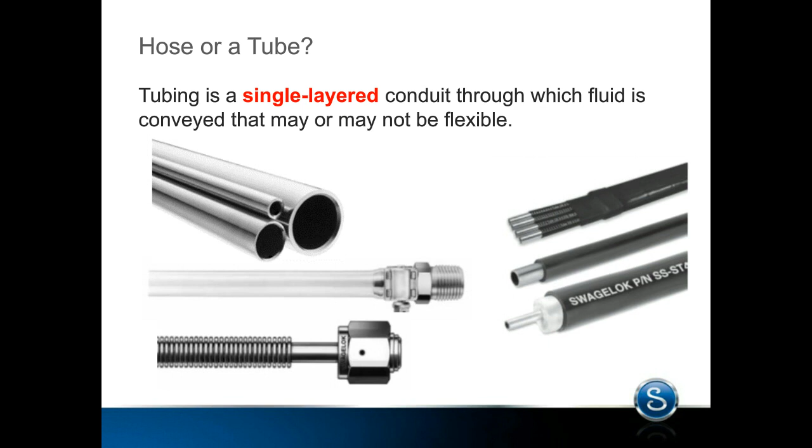Now, these are single-layered tubes that are still flexible. So people think of this as a hose, but technically these are actual tubes - we make them flexible, but they still act like tubing because they have only one layer.

So a hose, what is a hose? A hose is a multi-layer conduit where gas or liquid flow through. These multi-layers are what make hose much more complicated, but also allow the hose to perform better than tubing in some applications. The different layers are listed here.

They consist of a core tube, which is the wetted surface of the hose - it sees the media, so it's important to understand how the core tube is going to interact with the media. There's the braid, which is the pressure-containing layer or component within the hose. It's what maintains the pressure, so the stronger the braid, the higher the pressure the hose can contain. And the cover, which could or could not exist on a hose.

Sometimes hoses don't have covers and the braid is exposed, but some hoses have a cover that makes it cleanable or more abrasion resistant. Then there's the end connection, used to connect to the system. The end connection is inserted into the hose and either crimped, welded, or pushed in, and it needs to maintain the same pressure rating as the rest of the hose.

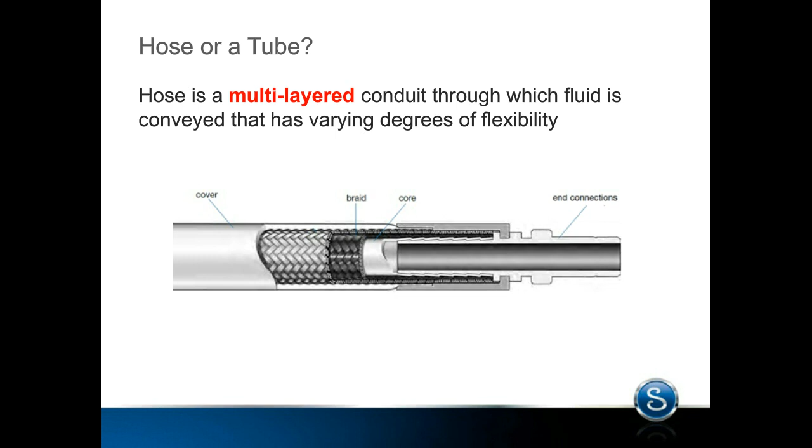As Swagelok has been in the hose business, we've gone around and inspected, visited customers, and collected data and comments from different customers. Some of them are listed here, and it gives us the impression of how different customers think of their hoses in their plant.

So some people say a hose is a hose is a hose. Just use whatever hose is available on the shelf. It doesn't really matter, why does it matter which hose I use? I just need to get it connected so the system is up and running again. And the hose lasts a couple months, but it's the way it's always been, so that's just what should be expected.

But other customers look at things a little differently, and they understand that selecting the right hose can greatly improve the way the system works. It can also greatly improve the overall safety of a plant, which can be even more important.

Some comments here: vibration used to cause leaking within weeks with our hose, but now we've selected the right hose and have no issues. Simply changing the way the hose was routed completely changed our maintenance program, so the customer was able to change the preventative maintenance schedule based on the routing.

All we did was change the hose series, and it now lasts over 20 times longer. Same system parameters, pressures, temperatures, and what have you, but now the hose lasts 20 times longer because the right hose is selected.

And basically, we won't think of a hose as a commodity again. You see different efficiencies based on whether a customer is really engineering the right hose into the system, or if they're just using whatever is available off the shelf or whatever was used last time. It can greatly impact how a fluid system works and how an overall plant is operated.

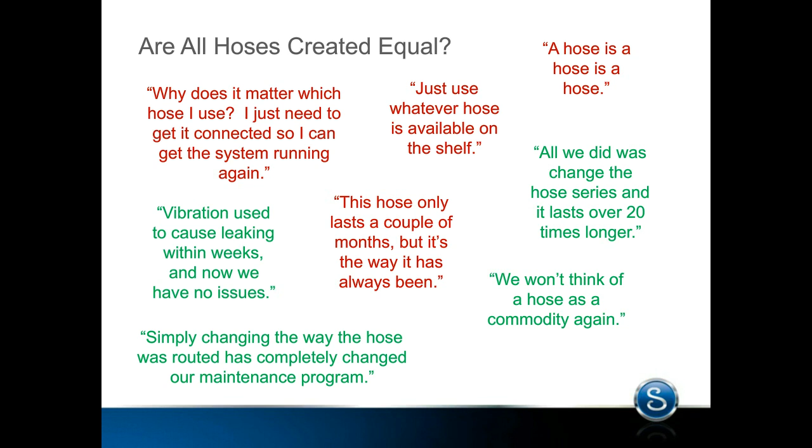So we want to ask a question to the group, and this can depend on what kind of media you have at your facility, but on the market there are many different types of hose: metal core, Teflon or plastic core, thermoplastic, and rubber core. We're interested in learning more about what kind of hoses you use. So at this point we'd like to take a quick poll on what type of hoses you commonly use in your facility. It could be all of these, but what do you use the most?

Okay, so it looks like we have no thermoplastic users out there, and this is actually in line with what I expected. We see when we go around to customer sites a lot of Teflon core and metal core. We don't see a lot of thermoplastic, but Teflon and metal core tend to be the highest used hoses that we see as well, so good to see this is in line.

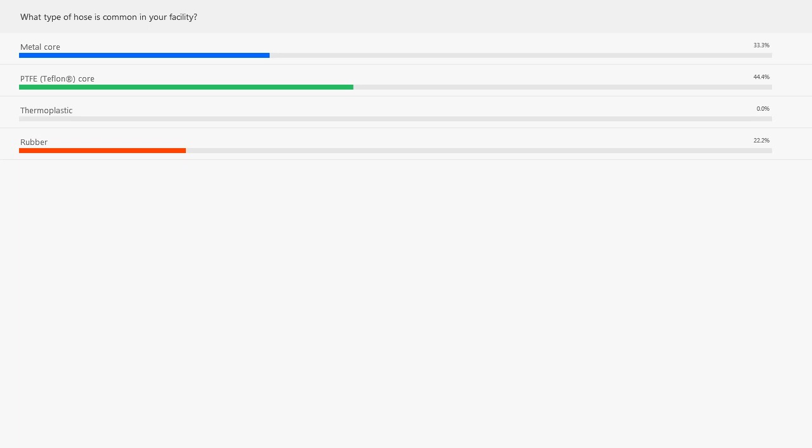Now, one more survey question before we move on to what STAMPED is.

You probably can tell from the question here, but what factors do you use when selecting a hose? It could be the size range, the temperature of the application, what kind of application it's going into, what the media is, whether it's corrosive or gas or liquid, what the pressures are, end connections, delivery considerations, or maybe none.

Different customers look at these different factors for different applications in many different ways.

Okay, so most people say the application. That's good to know. I think you can probably tell where this is going. We recommend that all these factors are looked at very strongly, and we'll get into why.

Yeah, so no one says media. Very interesting.

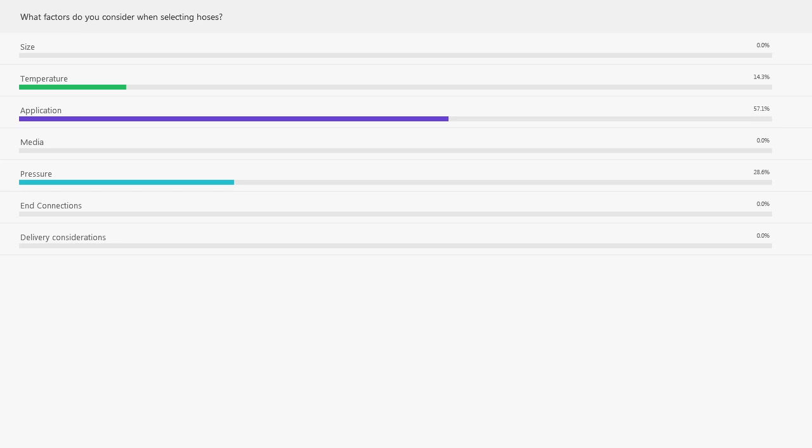We recommend the entire STAMPED acronym be looked at very closely when selecting the right hose, and we're going to explain why and go into detail on a couple of these a little later.

The first letter of STAMPED is size, and that basically means are you going to get enough flow through the application, and is the hose the right length for the application? That second bit is something that is forgotten quite a bit.

For size, the bigger the hose, the larger the flow you can get. A general rule of thumb is if you double the diameter, you quadruple the flow rate, because when you square the radius you get the flow area, so the radius is a squared term, and you quadruple the flow rate. So you go from a quarter-inch hose at 50 psi flowing 20 liters a minute, to a half-inch hose flowing 80 liters a minute, and so on.

You need to make sure you get enough flow for whatever your media is. There are various calculations to determine that, but many times that's already known going into the application.

More importantly, though, with hoses, many times they go into a dynamic application, so the hose is moving and bending, and it could be doing that repeatedly all day long, or just on occasion. Different movements require different amounts of excess hose to complete the movement without damaging it, and that can be forgotten when selecting the right length of hose.

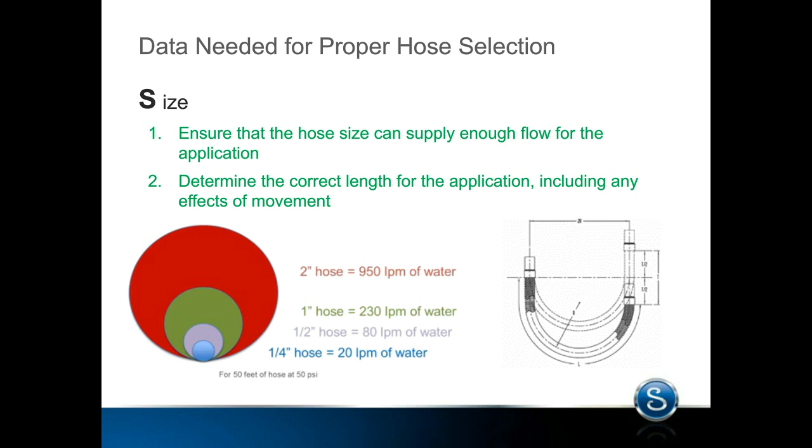Next in the acronym is temperature, T. This is pretty straightforward: you need to make sure the hose meets the temperature requirements of the application. This typically comes down to what the core tube is made out of. The core tube usually is the temperature restrainer—not always, but most of the time it's the temperature restraint in the hose.

Fluorocarbons, basically the Teflons and PTFEs, PFAs, widen that range quite a bit, especially on the upper side, up to 400 or 450, depending again on the material and how the Teflon is formed. And then of course the widest range is metal core tubes, offered up to 1,000 or so, depending on how it's made and the material, and as low as -300 or so. So if temperature is a concern, it will affect what type of core tube is required for the hose.

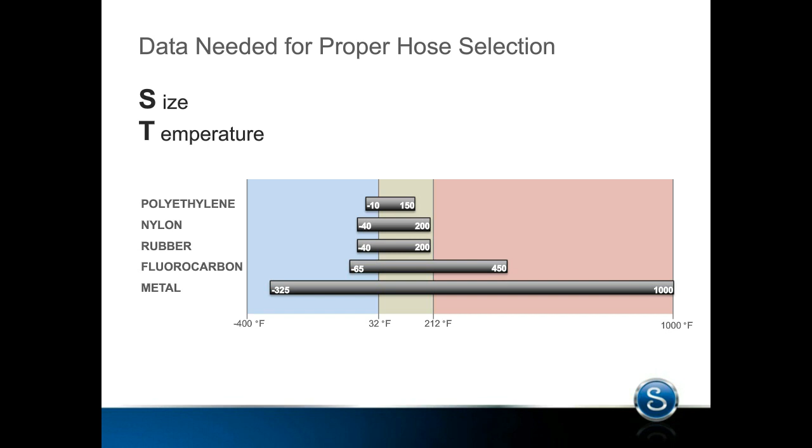Next in the STAMPED acronym is application. This was people's top choice, and I understand you could only choose one out of that list, but this was people's top choice. There's a lot we can talk about with application—many times this can come into whether or not there's vibration, whether or not there's a lot of movement, or whether it needs to be connected and disconnected many times.

But in this particular case, what we're going to focus on are the pressure variations. This isn't necessarily the overall system pressure, but basically how much pressure variation and how fast it happens in a system. We break this down into 3 groups when we consider hoses. The first is pressure impulse, meaning there's a pressure increase or decrease very, very quickly—we see this as a large pressure variation in under 2 seconds.

This can happen most commonly from opening and closing a ball valve. Imagine a quarter-turn valve that opens in well under 2 seconds, almost instantaneously. That full pressure flows into or out of the hose very quickly, and we call this a pressure impulse.

Now this is different for gases and liquids. Liquids, being incompressible, are the worst case because the momentum of the liquid does damage to all the components in a fluid system with a pressure impulse, including hoses. The core tube needs to absorb all that momentum when a pressure impulse occurs, and different core tubes are better at absorbing that impulse.

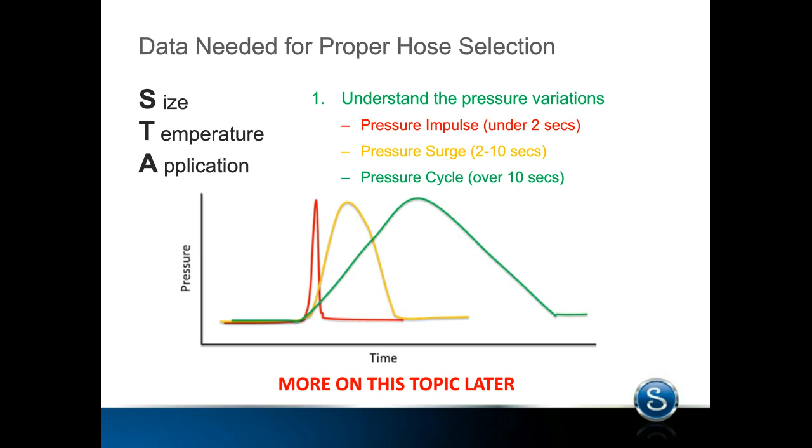Next in our STAMP acronym is pressure. Now, we talked a little bit about the pressure impulses and things, but what we're getting at here is just what is the system pressure? What is the design pressure, ignoring the impulses and spikes and surges and things? So the things to look for here are listed.

So it's important in a vacuum application to make sure the hose is rated for vacuum. There are times customers actually do not know if there is vacuum in their application, and vacuums can happen without an actual vacuum pump. You can have Venturi effects and things that cause vacuums in a system. So it's important to understand if that's going to occur if you're selecting a hose that's not rated for vacuum. Many are, but not all of them.

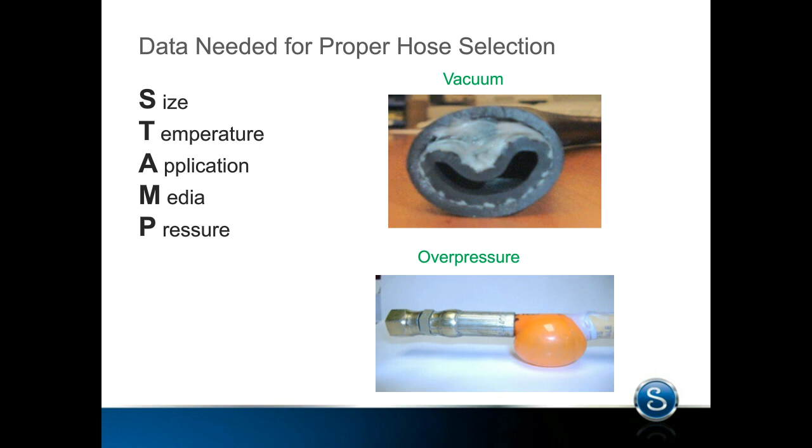Next is end connection, and of course this is fairly straightforward, but the end connections usually are chosen that fit into the system, so whatever we're connecting the hose to. But the thing we can run into with this, and all end connections really are offered on hoses, but what customers run into is a hose that needs to bend a certain way in order to be installed.

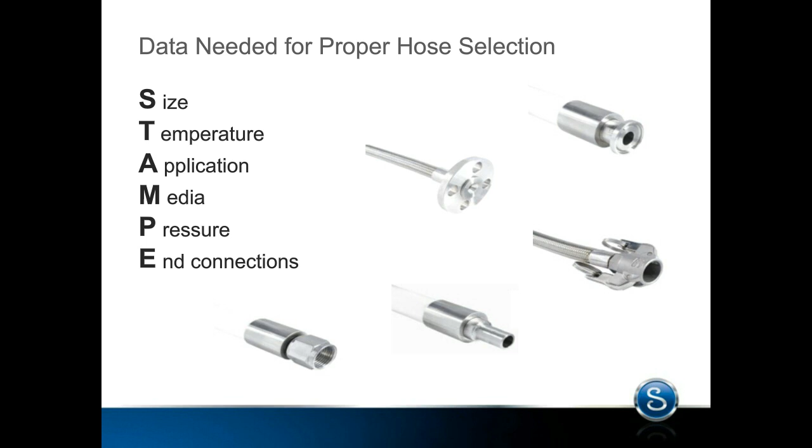And then lastly is our delivery considerations, and this one is probably the easiest of all. But this could pertain to a lot of other things related to the hose, such as is special testing needed in order to ensure that the hose is made properly. There's a lot of different testing that can be offered beyond the standard production testing. And are there things like special tags, special labeling, special lay lines that might be needed in order to have the hose marked properly for the application it's going into?

And then how should the hose be shipped? Is it okay to coil, or does it need to be bagged, and things like that, so that the hose arrives in the proper cleanliness and proper condition. So again, pretty straightforward. So at this point, are there any questions?

Yep, go ahead. Yeah, I was going to say, wow, there's so many things to be considered.

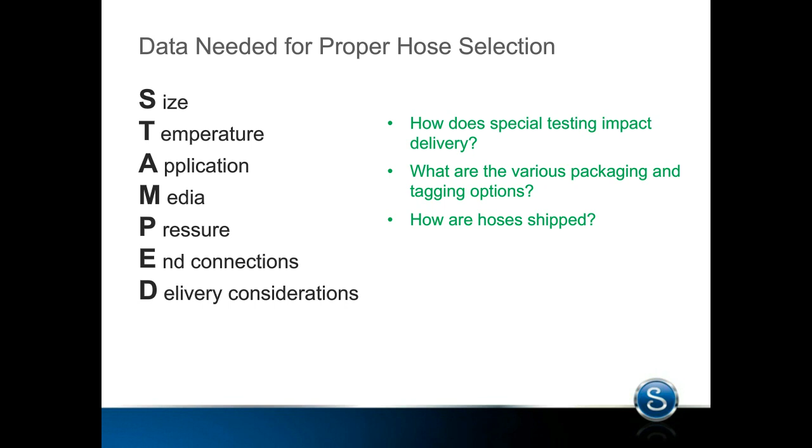So now we're going to get into some more advanced topics, and we touched on them a little bit with the stamped acronym, but we want to explain them in a little more detail because this is where people really go wrong when selecting hoses sometimes, and so we want to make sure that they're understood as best as we can. So the first one being permeation.

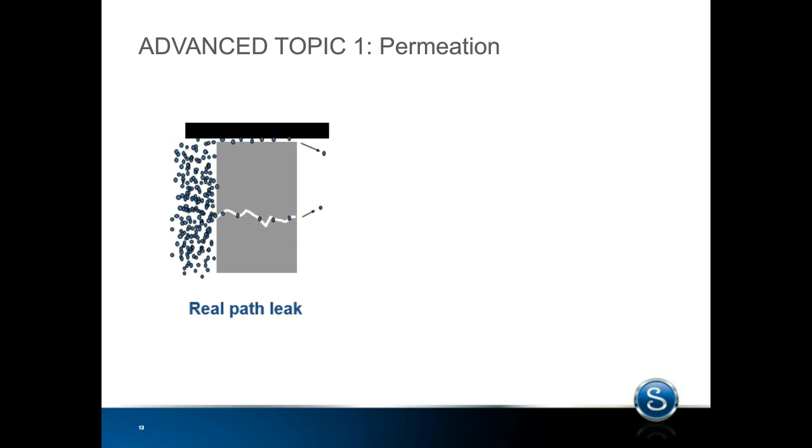And the gas molecules escape to the other side. And it's more of a function to do with what the gas is and what the media, or what the component seal material is.

Okay, we have a couple questions here. I'll go into those. First one is, does fiberglass braid resist permeation?

We've actually done some testing on this, so it's interesting. What we found is that the braiding itself on a hose resists no permeation whatsoever. We thought maybe it might, but this is happening on such a small molecular level that the holes between the braid actually do absolutely nothing to resist permeation. The only thing resisting permeation in a hose is the core tube. So whatever that core tube permeation rate is, the hose will see.

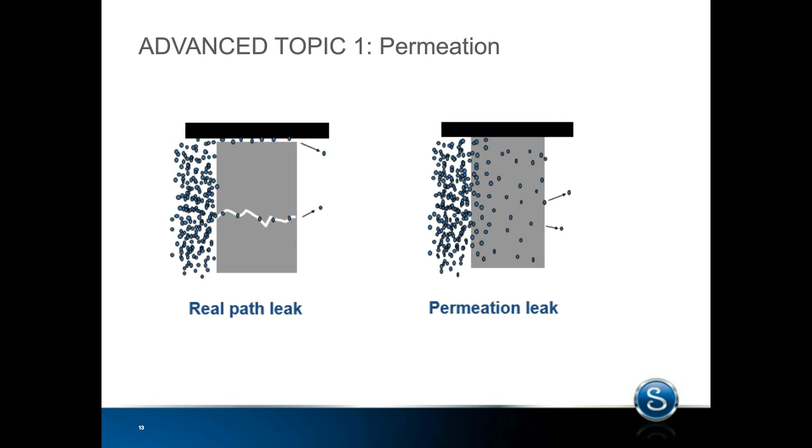And it will permeate through, the gas will flow through the braids basically instantly. Okay? A good question. We've actually thought about that and went into testing it.

So again, permeation flows through the core tube or through a valve seat or through a fitting connection, whatever it might be. And it happens at different rates based on the gas and based on the material it's flowing through. And it has a lot of other variables as well.

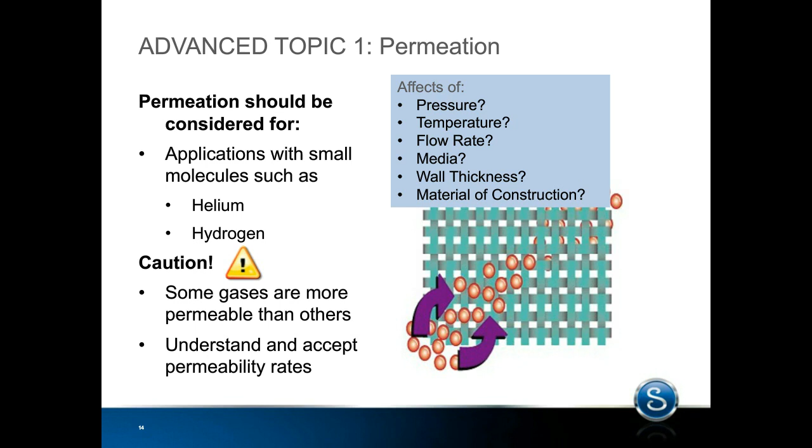And this is why permeation is a difficult topic to properly address in a lot of detail or a lot of precision. But the more pressure inside a hose, the more gas molecules will enter the hose and permeate through. The higher the temperature, the actual Teflon or hose core material will expand, making the holes larger, so increasing permeation, basically separating the spaghetti more, right?

Actually, flow rate does not affect permeation at all. We thought maybe it might, but flow rate through a hose does not affect permeation at all. The smaller the gas molecules, as shown here, like helium and hydrogen, will permeate much faster than larger gas molecules. And actual gas permeates obviously much faster than liquid.

Liquid almost permeates to a level that is zero. The thicker the wall, or for example, the thicker a valve seat or whatever it might be, the slower the permeation will be. It's inversely proportional. So if you double the wall thickness of a hose, you will half the permeation rate. And the materials of construction, there's different things you can do to rubbers and plastics and Teflons that will slow permeation, but it has other effects. And so we want to get into some of those effects.

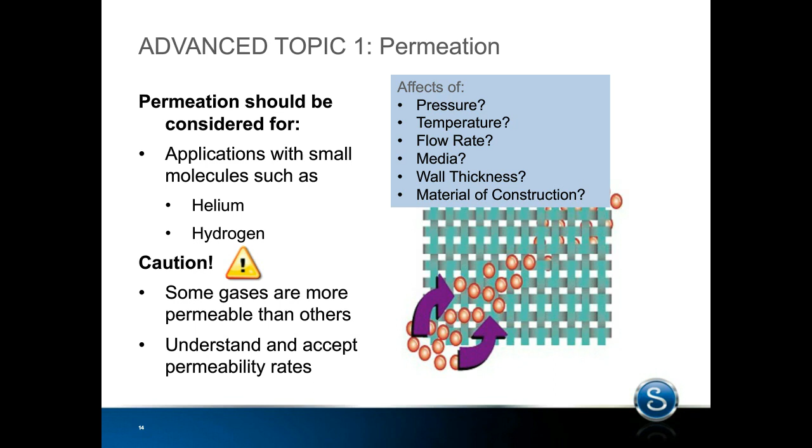And to understand the effects, we want to make sure that we understand these two core tube types. So the first we're going to compare is a fluoropolymer core tube. This is a Teflon, PTFE, PFA, or other different material core tubes.

There are things we can do to these core tubes that change the permeation rate, but in general, they're permeable. You can get these core tubes with carbon black that helps with something called static dissipation, which we don't have time to get into today. But they're smooth bore, so they're cleanable, and they tend to be more flexible. That's their advantage. The disadvantage tends to be that they're permeable, and virgin Teflon tends to have relatively high permeation rates.

We can take this Teflon and bake it, and we call that a sintering process. We can bake it at different lengths for different amounts of time. What that sintering process does is tighten up the molecular structure of the Teflon, making the spaghetti closer together, which slows down the permeation rate.

There are two that we use at Swagelok that we call slow sintering and post sintering. Slow sintering is a slow baking process after the core tube is made, and post sintering is a very long bake after the core tube is made. Slow sintering, think of it as a pizza oven, where the core tube slowly moves through an oven, like a pizza. The post-sintering is taking the entire core tube and putting it in an oven and leaving it there.

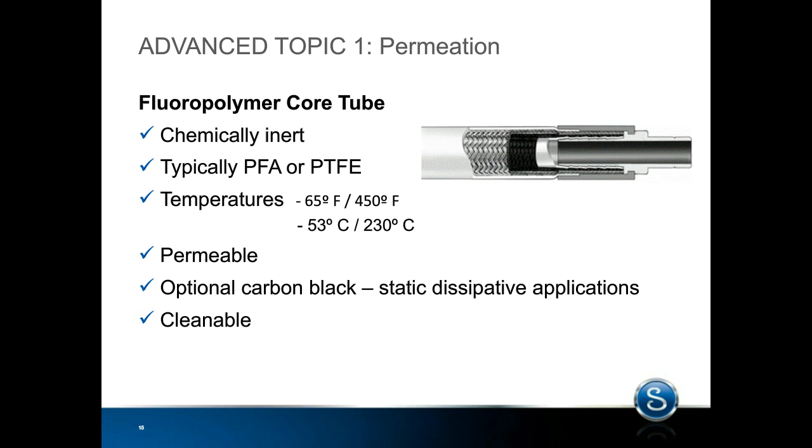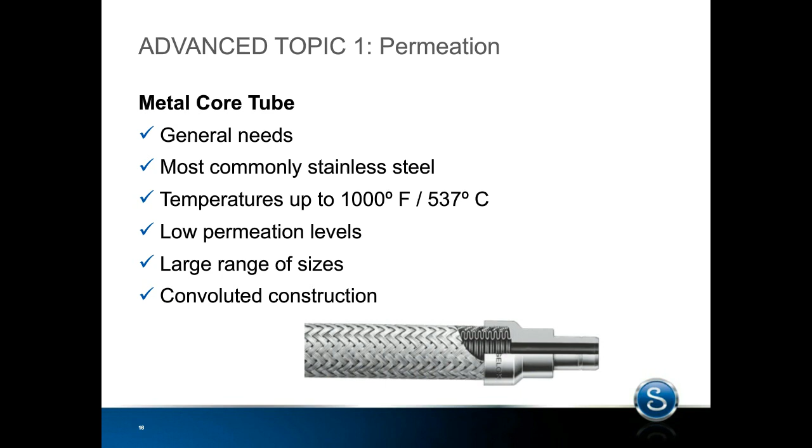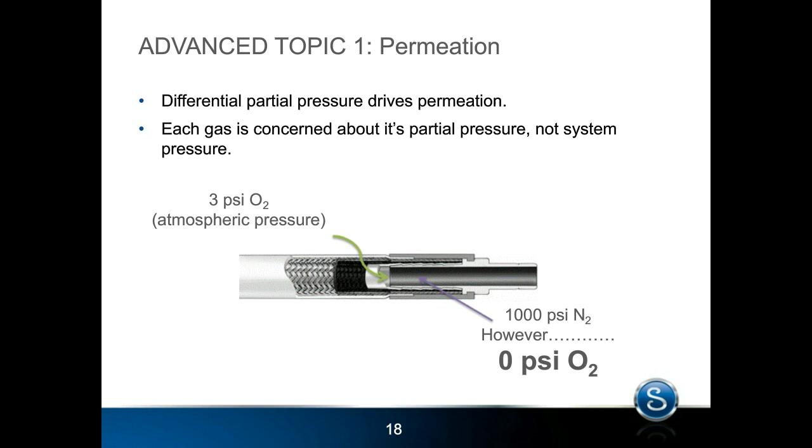What people don't always understand is that there's 0 psi oxygen on the inside of this hose, and 3 psi oxygen on the outside. People tend to assume that 1,000 psi of nitrogen will stop the oxygen from permeating in, and that's absolutely incorrect. Oxygen will permeate into this hose at a slow rate because it's only 3 psi, but it will permeate in. That's something not everyone is aware of, and it can affect the way hoses work if it's important to keep oxygen out of a system. In this case, it will not - it will permeate into the hose.

So it's important to understand the partial pressures of every gas surrounding a hose if permeation is a concern.

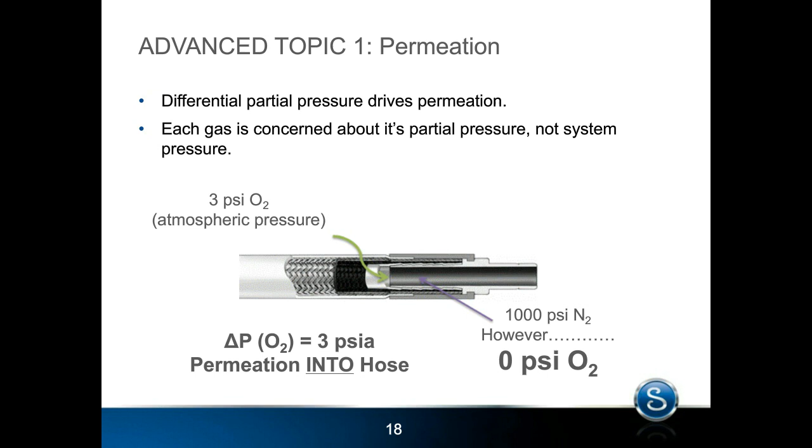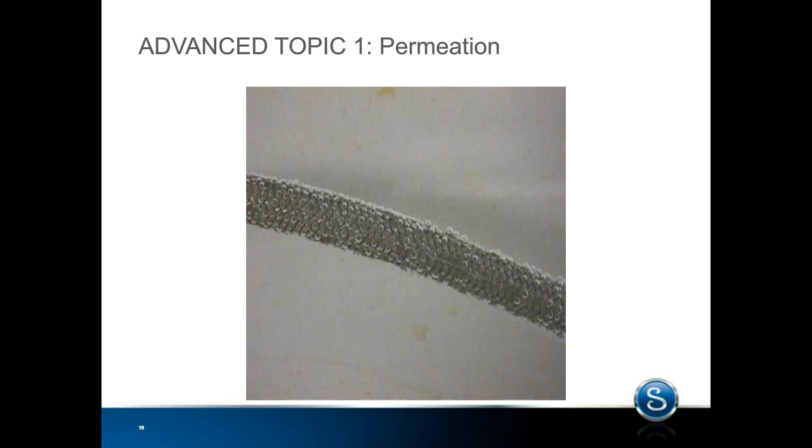So when we look at relative permeation rates, Swagelok has done quite a bit of testing with this, and we're actually going to start doing much more. We look at relative permeation rates of different core tube types, and we have some listed here. So mechanically and hydroformed metal core tubes, we'll talk about what that means in a minute.

And then we talked about these three Teflons. So there's normal Teflon, there's the slow sintered, which is like the pizza oven Teflon, and then there's the post sintered, which is baking a cake Teflon. And then there's different rubbers, right? Buna, Viton, Kalrez, whatever it might be.

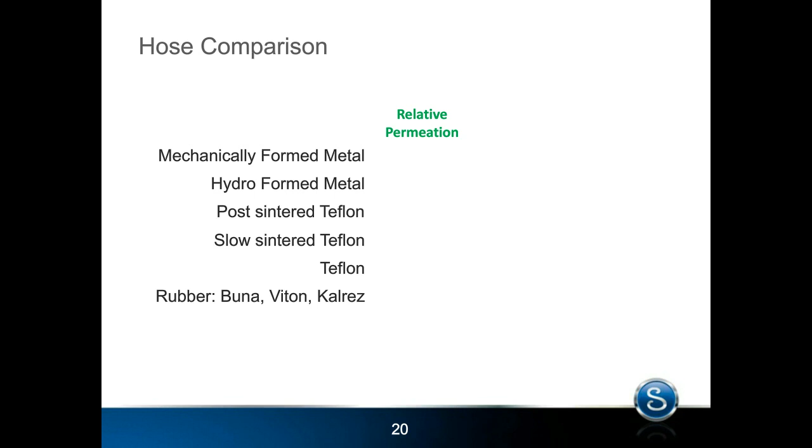And if you look at relative permeation rate, if you say metal is a 1, so very, very low permeation rate, a post-sintered Teflon permeates about 10,000 times more than that. A slow-sintered Teflon about 20,000 times more, so a slow-sintered permeates about twice as much as a post-sintered. Normal Teflon, though, permeates about 10 times a post-sintered Teflon. So that post-sintering process that is done cuts the permeation rate of a Teflon into 1/10, and that's the advantage there. That slow sinter process, you can see, cuts it in 1/5.

And then rubber hoses will permeate the fastest because the material structure has the largest holes between the molecules of the hose.

Okay, we have a question here. What hose is recommended for a high-pressure CNG up to 3,600 PSI? Typically for those type of applications, we recommend our thermoplastic product lines, which we don't get into in this presentation, but I'd be happy to send some detail on that later. That's our thermoplastic nylon core, essentially, products.

And we have another question now, too. How long should the hose be when used to absorb vibration? Yeah, that's a very good question. Is Teflon or metal a better choice? And what about routing the hose? Those are very tricky questions. The easiest one is that middle one.

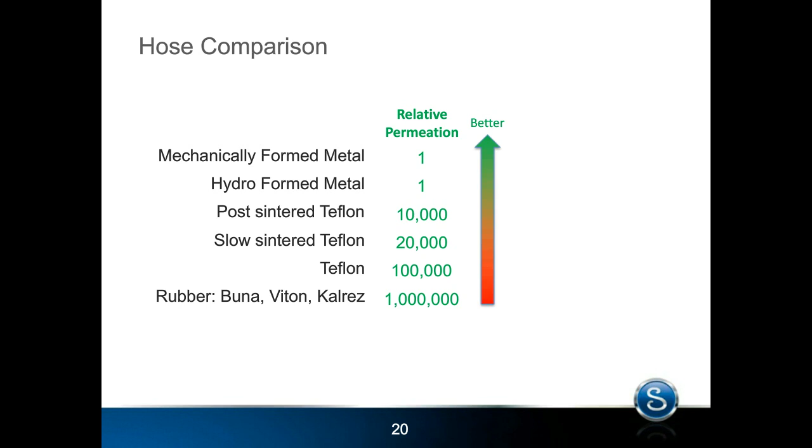We're going to move on now to impulse, and we discussed what these different impulses are: impulse, surge, and pressure cycles, so I won't repeat that. But this comes into play with metal core tubes because, again, metal absorbs impulses worse than Teflon core.

And so a metal core tube can be made two different ways. But before we get into that, what basically is done is a steel strip is turned round and then seam welded down the length of the round tube. And then we form these convolutions in that tube.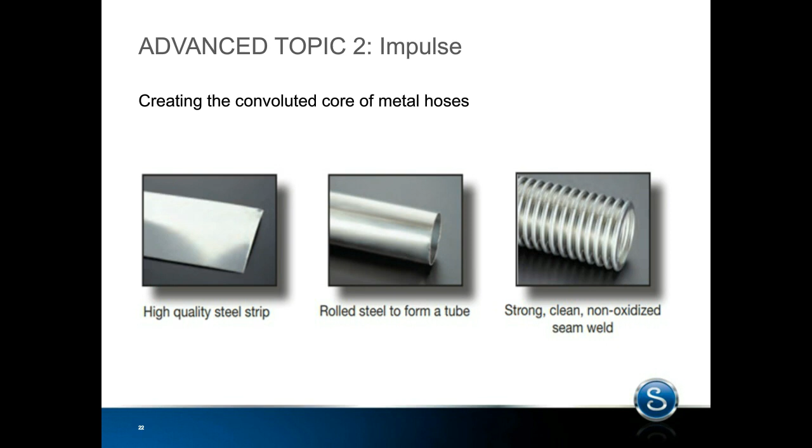And those convolutions can be formed two different ways. They can be formed mechanically, which essentially is a press form that pushes the material into the convolutions, or they can be hydroformed. A hydroform is pressurizing the inside of that tube with water and making it create that form against a die. And that's a far superior way to form a metal tube because it spreads out the forces evenly along the entire core tube. This keeps the core tube thickness the same, so we can maintain a 4-to-1 burst.

There's no thin spots, and it also spreads out the residual stress so that there's no high or low stress areas. Mechanically formed tubes get high stress areas right where the forms are made, and it also makes very thin sections of the core tube, which can affect the burst rating.

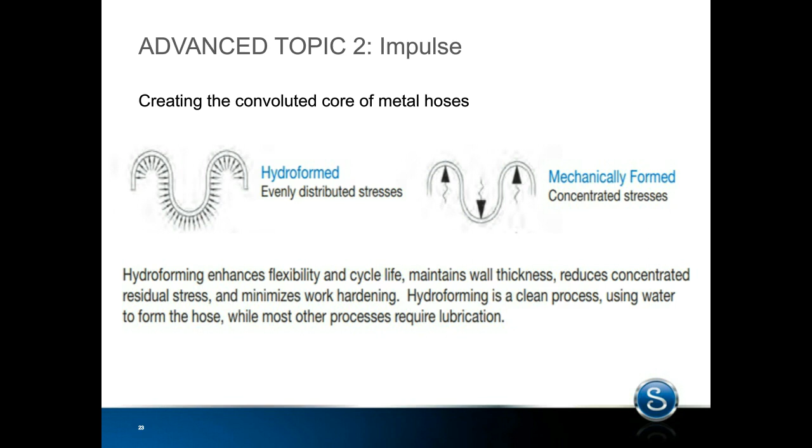Now we see this come into play when we look at how a metal core tube withstands impulses. We look at this same graph we looked at for permeation, but now for how well these core tubes can withstand impulses. We impulse cycle these core tubes and test to see how long they last, essentially how many impulses they withstood before rupture. A mechanically formed metal core tube will last in the neighborhood of 10,000 impulses. So when we do that ball valve cycle test, it's only 10,000, as compared to rubber, which lasts well over 1 million.

The hydroforming process spreads those stresses out and maintains the correct wall thickness in the core tube, and we get about 7 to 8 times the number of impulses out of a hydroformed core tube. Again, it's not quite to the level of Teflon. Teflon, being a softer material, can absorb the pressure impulse much better, and we get hundreds of thousands of impulses based on the Teflon. But hydroforming metal does increase the impulse life a great deal.

Now you can also see the sintering process decreases the actual impulse life, because what's happening during sintering is you're hardening and compacting the Teflon. So it improves the permeation, but it decreases the impulse life. It's still very high, but it decreases the life a bit. These things are important to understand with your application to see what type of core tube is right.

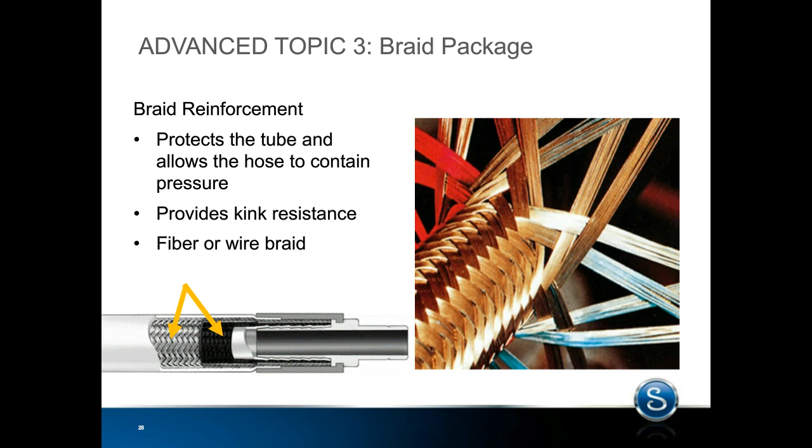A braid package is the angle of the braid, along with the number of braids in the hose, and the wire material and thickness. All that needs to be specified by a proper braid package. One thing we've found to be very important is the braid angle, which is part of the braid package. Of course we specify the number of braids, wire thickness, wire strength, and wire material, but we also specify the braid angle, and we've found this to be a key component in how a hose works. Even though all hoses may look the same, based on the braid angle, they can perform very differently.

The braid angle is the angle at which the braids wrap around the outside of the core tube, as you see with the red lines. If the braid angle is too shallow, meaning the wraps go around the hose too quickly, what happens is, under pressure, they steepen, and the hose core tube is allowed to grow in diameter.

The hose material can't be made magically, so when the hose grows in diameter, it shrinks in length. This can lead to pretty catastrophic failures. First, the core could burst because it can't withstand that kind of growth in diameter. Or, because the hose is shrinking, it could pull the end connection out. Both are very bad and dangerous failures, so a shallow braid can be very dangerous.

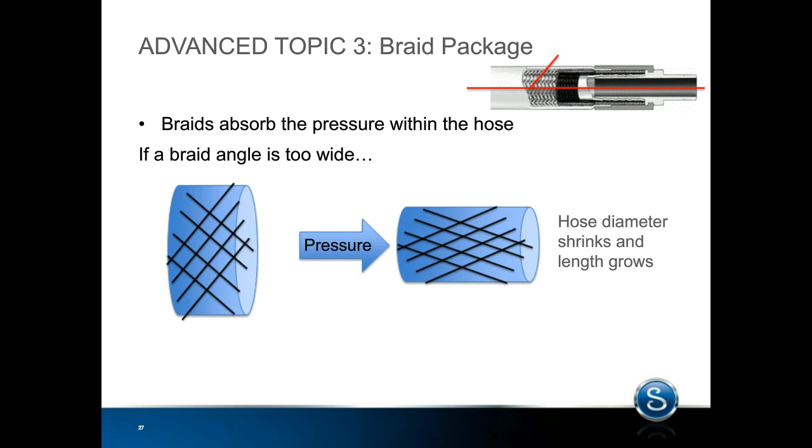Likewise, a steep or too wide of a braid angle under pressure causes the opposite effect: the hose will crush the core tube. The braids will flatten out and crush the core tube, and the length will grow. The length growing usually isn't a concern, but crushing the core tube could collapse it and remove the crimp pressure. So if this is a crimped hose and you crush the core tube, you can lose the crimp pressure on the end connection, and it could separate from the core tube, which is again a very dangerous failure.

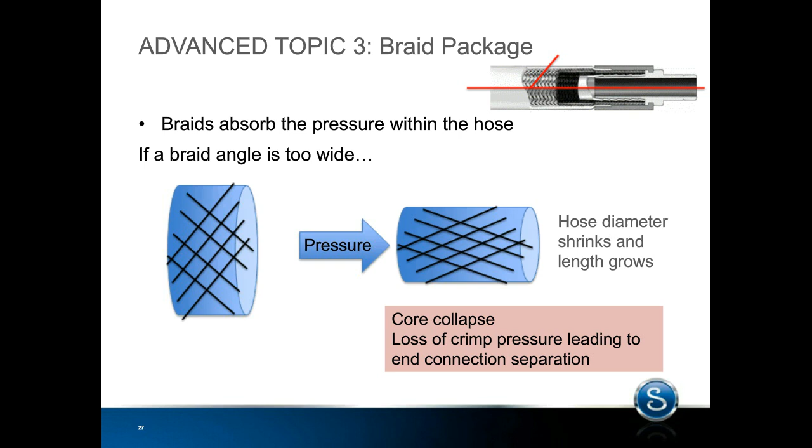So braid angle is an extremely important factor in a braid package, and we do a lot of testing at Swagelok to maintain what we call a neutral braid angle. Every hose, depending on the braid material, braid wire count, and hose diameter, has a different neutral angle. We test that closely to make sure we maintain it so our hoses do not grow or shrink. The braid maintains pressure on the hose without allowing it to grow or shrink, keeping our 4-to-1 burst ratio, and everyone's safe.

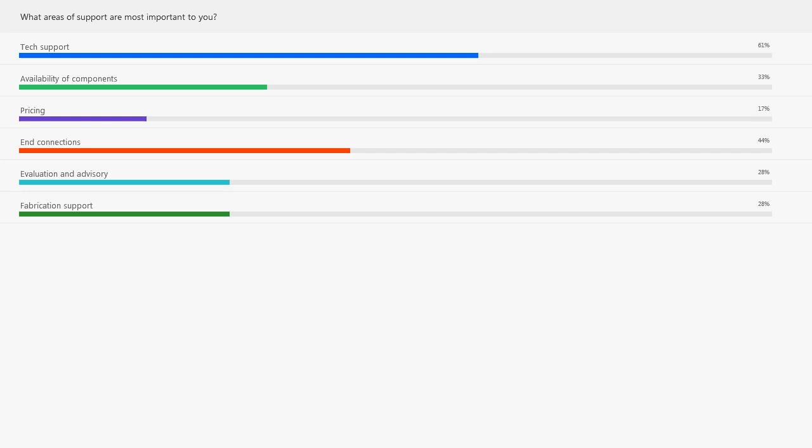So as Doug said, my name is Nick Iverson. I'm a field engineer with Swagelok, and to give you a little background, what the field engineer does is work really closely with our customers, and I spend a lot of time out in the field, on site looking at applications and just trying to gain a better understanding of what customers are doing and how that affects the products and how to optimize the product usage and the systems.

So with hose being one of my areas of specialty, I've also spent a lot of time on site specifically looking at hoses. And the idea with hoses is always knowing that a hose is not going to be a permanent component in your system. You know that the lifespan of a hose really depends on how you use it, and hoses need to be on preventative maintenance schedules. So when I go on site, what I look for in the following slides is kind of like a checklist of things to look for when you're walking around looking at your hoses, trying to understand the current situation and looking for improvements in your system and ways to increase the lifespan of your hoses.

So here's the things to look for. Is this a building slide? Am I correct here? Click on it. Okay.

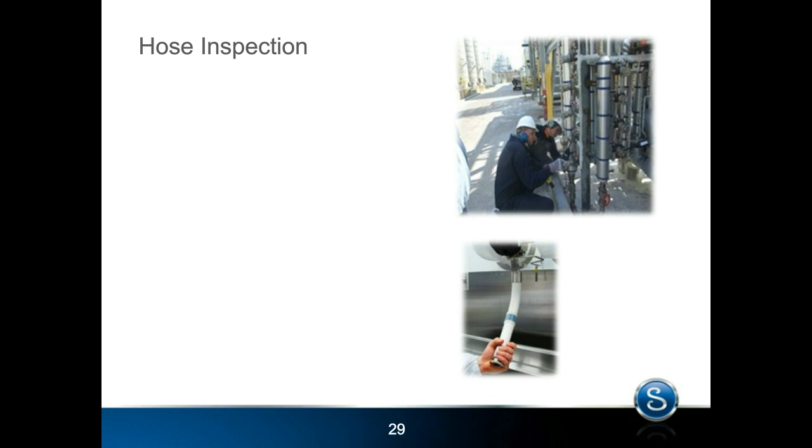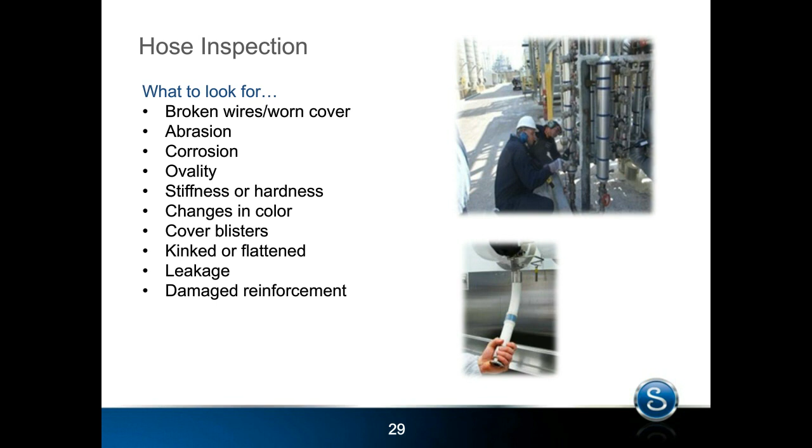So as we start to cover each one of these points, I'll let you know what causes this kind of damage, and then potential ways that you can address this damage.

So the first one here is the worn cover, broken wires. This is typically caused by excessive abrasion. It's easy to spot, but to address it, you need to do some root cause analysis and try to figure out what could be causing the excessive abrasion. Is it rubbing against another hose, or is the location of the hose a problem where things can be moving past it and rubbing up against it?

So when you have this excessive abrasion and you start to damage the cover, the job of the cover is to provide some protection for the braid. Once that cover is gone and removed, you're no longer protecting the braiding the way that you'd intended to. One of the issues is that it can wick up moisture, and moisture can get underneath the cover and start to cause damage to your braid. In the pharmaceutical industry, damaging the cover means that hose is going to be less cleanable - that's also a problem there.

And of course, if you damage the cover itself, you're lowering the pressure handling capabilities and you're reducing the kink resistance. So you're increasing your minimum bend radius.

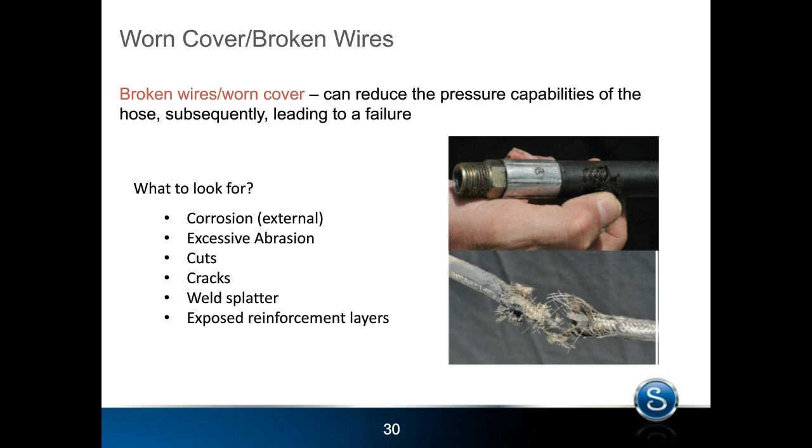Ovality is basically - ideally your hose is going to be perfectly round, but as you start to bend a hose, you get tension. You get tension on the outside, and compression on the inside, and those forces are battling hoop strength, and eventually your hose is going to start to become more oval shaped. As you walk around and look at your hoses, any hoses that look like they're a little bit squashed means they're getting very close to their minimum bend radius, and kinking is imminent. So look for these.

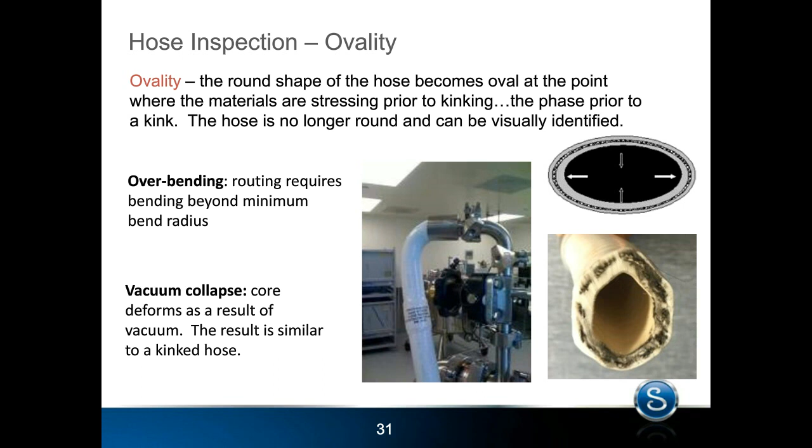So what is a kink? I discussed it as when the outside of the hose is in tension and the inside's in compression, and when those forces overcome the hoop strength, the hose kinks. Kinking is very bad for a hose because, like Doug mentioned earlier, a hose is made up of many layers, and we can't see what all those layers look like. From the outside, you can usually see that a kink has happened, whether the kink is happening right now or has happened in the past - there's permanent deformation on the hose. What we can't see is what the inside layers of the hose look like, and if they're permanently deformed, you've definitely lowered the pressure handling capability of your hose. So anytime you see a kinked hose, it's definitely time to replace it.

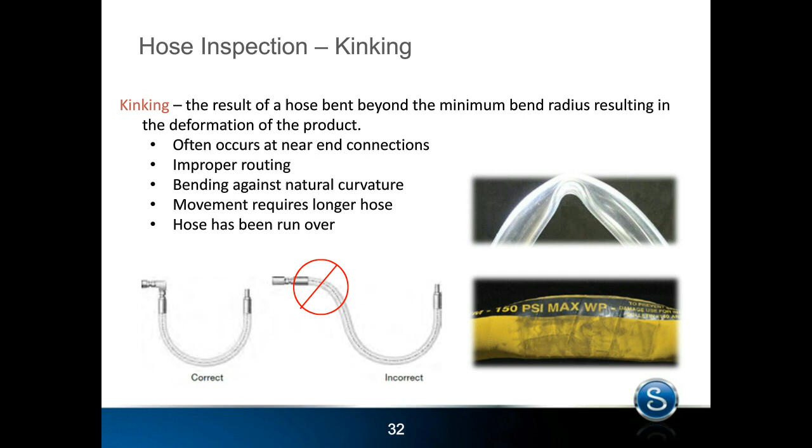Some other issues with kinking hoses could be that if you actually damage the braid and the braid wires are sticking out, that's definitely a safety hazard. If you're handling the hose, like in that lower left picture, you wouldn't want to run your hand along it or move it around, because you could fish hook that braid into your hand. That's a safety issue. These other pictures show what happens when a hose bursts at a kink.

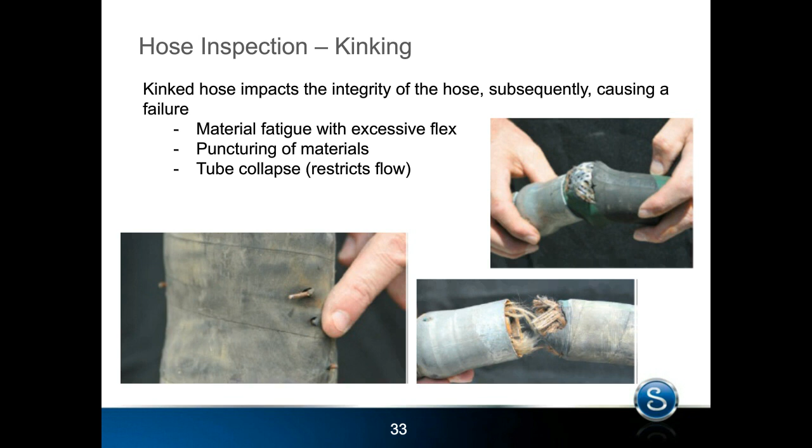Stiffness or hardness - these are obvious ones. If you look at a hose, you can see this, and a lot of you have maybe seen something like this. It's pretty typical for a rubber hose that's been exposed to the environment. UV will continue to cure the materials in the hose and cause it to crack and dry. You could call it dry rot.

Exposure to extreme temperatures and chemicals can also damage the hose. One thing people don't realize is that ozone can actually damage rubber hoses. So if your hoses are being used near high voltage power supplies, you should be sensitive to ozone damaging your hoses, and also near high intensity lighting sources. If hoses are stored in a warehouse setting with high powered lighting above them, those hoses should probably be covered so you're not reducing the lifespan of your hose before you even install it.

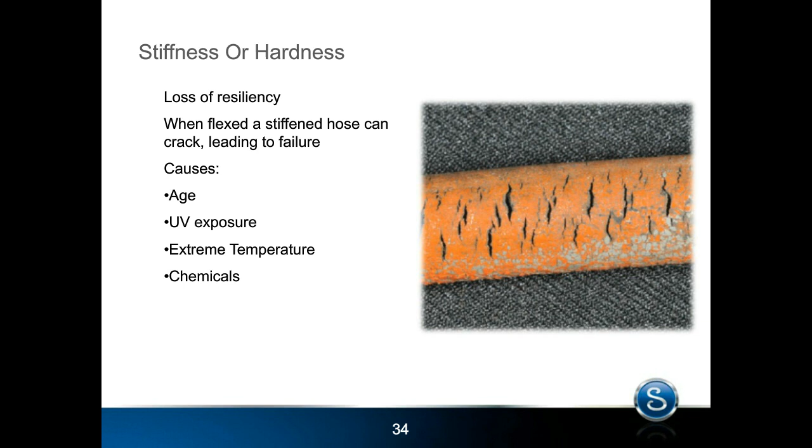Color blisters - this is kind of a no-brainer too. If your hose is changing color, something's chemically happening to your hose, whether it's chemical or corrosion. Anytime your hose looks different than when you installed it, and it's not just because it's dirty, but something's happening chemically or physically to the hose, it's time to take a look at it and possibly replace it.

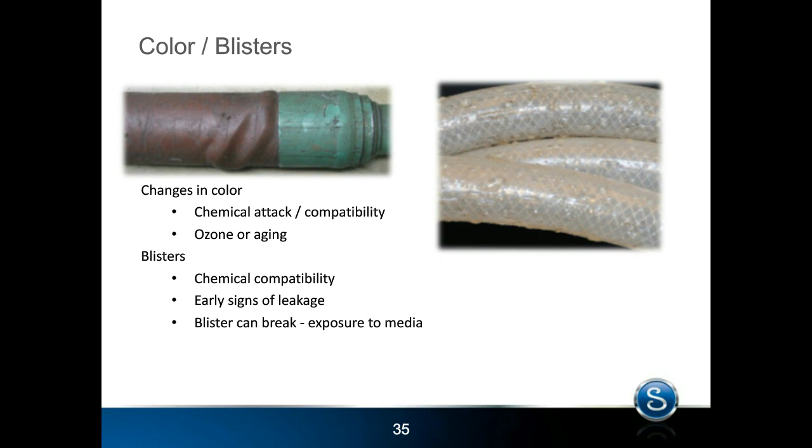And then just some other general damage to hoses that I see is a crushed hose, run over by something. It's not uncommon to see a hose that's been run over by a forklift, especially these rubber covered Teflon hoses. I see this a lot.

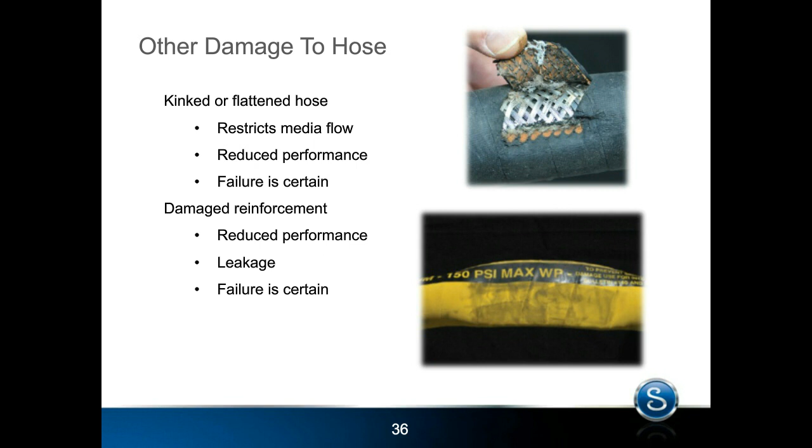I saw a question came in, but did it get answered? I think it might have. I don't think it did.

The question was: does the addition of fiberglass on your hose help with kinking? So any of the reinforcement layers are going to help the core tube. It's going to reduce the chance of kinking. So yes, a layer of fiberglass will definitely reduce the chance of kinking.

There's also accessories that you can add to hoses, in addition to the actual hose material itself. There are different types of spring, and in some cases armor, that you can apply to the outside of the hose. The armor - we have a product called Armor Guard - it actually reduces how far you can even bend a hose.

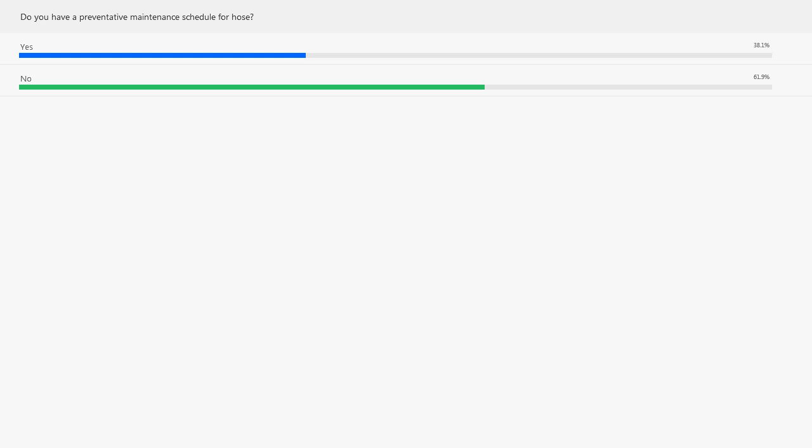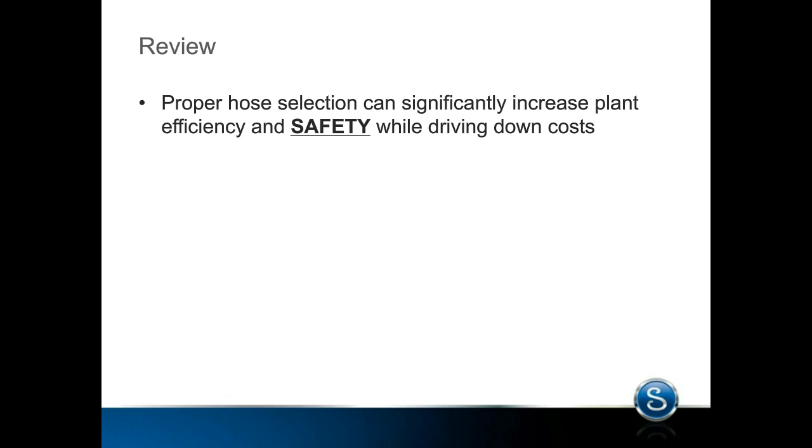All right, thanks, Dick. Yeah, so basically just a quick review, and I know we're out of time, but most importantly here, proper hose selection is something that needs to be done to increase your plant efficiency and, more importantly, your plant safety. We see it done incorrectly many, many times. There are obviously many factors that go into it, and we try to capture all those factors with the acronym STAMPED. So if there's part of that you're not looking at when selecting a hose, you should really consider all the aspects of the acronym STAMPED. And Swagelok, of course, has hose experts who would be willing to help out with any application you have.

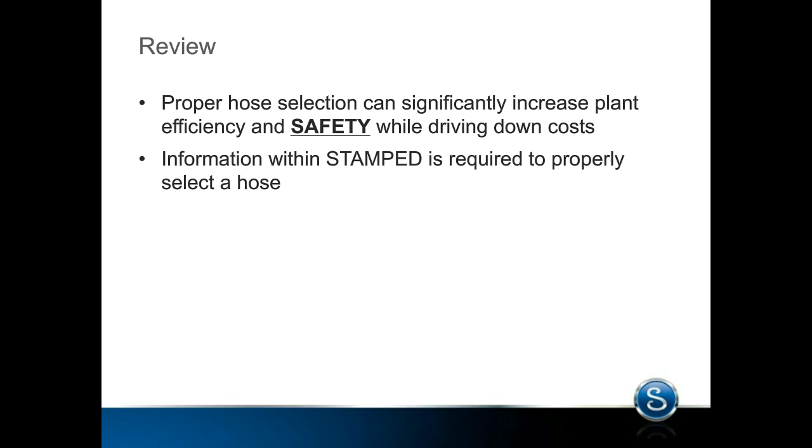Not all hoses are created equal. We've seen so many times that efficiencies and safeties are improved a great deal because of the correct hose being used in the correct application. And what we see most commonly are different permeation rates. Customers disappointed with permeation, using the wrong hose with a gas application, or maybe using the wrong hose in a pressure impulse application.

And of course, understanding the right braid package can greatly impact the quality of a hose. So we do a lot of testing and really understand everything that goes into the right braid design for each of our hoses.

And then most importantly, inspect the hoses. You're going to find many problems with hoses and potential near-future problems as well. Again, these are things that are fairly easy to see if you train yourself to do it on a regular basis, and it's important for the safety of everyone in the plant.